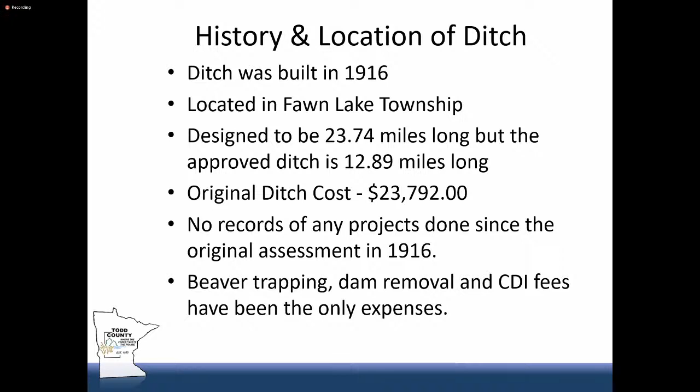Beaver trapping, dam removal, and ditch inspector fees are really the main expenses on this ditch system. It has a huge beaver problem. It's actually gotten better over the years, but in 2013, when the ditch systems were all brought up to date, there was an assessment done for $5,484.23, for beaver control and dam removal from the years 2008 to 2012. That brought the ditch system up to date on what bills were owed.

Then in 2015, there was an assessment that was all beaver dam removal and trapping. 2018's assessment was also beaver dam removal and trapping. We kind of did year-round trapping in 2018 and 2019, trapping year-round and doing dam removal whenever dams were found.

In 2020, we only had to assess $500 because there were fewer beaver dams reported and less trapping done. 2021's assessment was also $500, again with less trapping. For the 2022 assessment, there were some more dams reported this year, so I've got people trapping now and there will be more dam removal, so next year will be an assessment for that. I just put up a map.

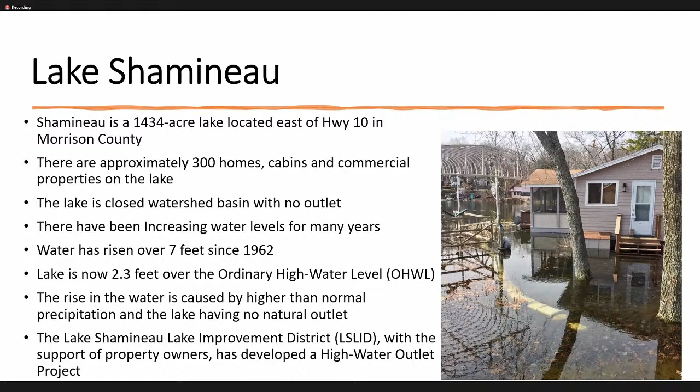The purpose of the high water project is to establish a maximum operating level, which Mike here is going to talk about a little bit in his presentation.

The project includes the installation of a lake outlet structure and pumping station at the west end of the lake. The water would then flow west, eventually reaching ditch 41 and then flowing to the Long Prairie River. You do have a route map that we handed out, and Mike is going to talk a little bit more about the route.

The LID has worked closely with the property owners along the route to ditch 41. For example, from Highway 10 over to where the ditch starts, we have worked with those property owners in Todd County to ensure that the route and the water will not be detrimental to their property. And we have obtained agreements for easements with the Todd County property owners west of 10, again to ditch 41.

They've also supplied us letters of support. In fact, speaking of letters of support, we received a lot of them, not just from those property owners, but also from property owners along ditch 41 and other Todd County residents. We'd like to take this opportunity to thank everyone who has signed a letter of support. We really appreciate that support for our project.

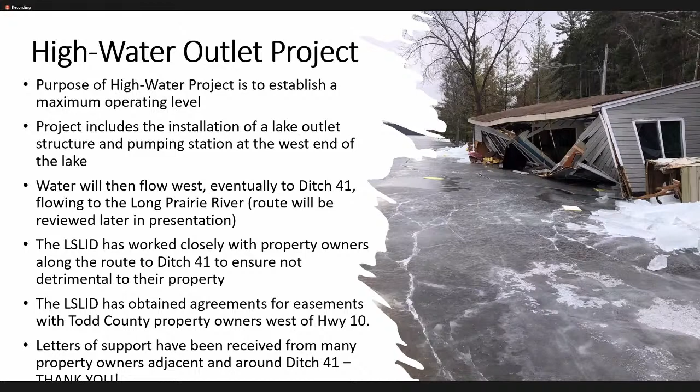A little detail on some of the funding. The project will be funded through charges to the Lake Shamineau property owners. The LID actually operates as a taxing district, so we tax ourselves for this project. So when I said earlier that 74% approved the project, they not only approved the project, they approved paying for the project. And I think that's an important thing for everybody to realize, is that we are paying for it ourselves.

There's no petition costs. There are costs, obviously, just to do this process. The LID is paying for them. It will not be paid for by Todd County residents.

One of the things we're very excited about is that Morrison County recently in May approved a resolution to contribute $200,000 toward the maintenance of ditch 41. They did that to show their support for the LID and for this project. That $200,000 will be available to Todd County upon award of a construction contract for the high water outlet project. So once the ditch petition gets approved, we go through design, we bid out the construction, and upon the award of that contract, that $200,000 would be available.

Another important piece for everybody to know is that an operating plan will be developed for the project. We're developing that by working with agencies, Todd County, DNR, and other agencies. Some landowners will have provided input. Mike will talk about this in more detail, but it will lay out when the pumping will occur and when pumping has to be paused. So there'll be some oversight through this operating plan.

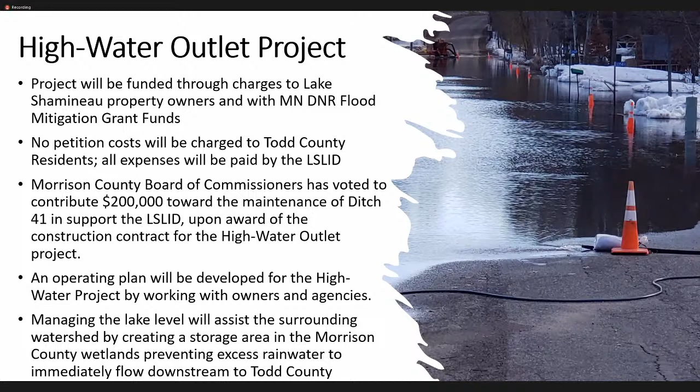Why is this so important to us? What if the petition is not approved? If the petition is not approved, the high water outlet project, as we're laying out tonight, will not be able to move forward, since access to ditch 41 is a key component to reach the Long Prairie River. So obviously this petition process is very important to us. And if the project doesn't move forward, there'll be continued flooding of homes and roads, and more property damage around Lake Shamineau and Scandia Valley. And of course, that $200,000 for maintenance of ditch 41 would not be available.

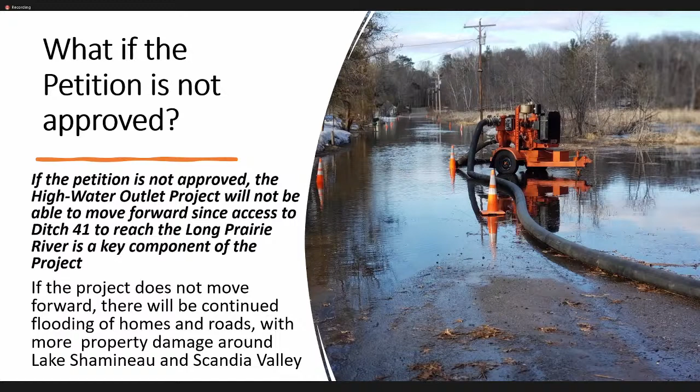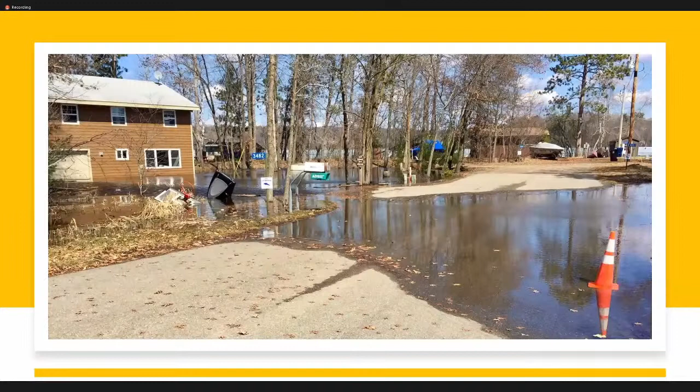And with that, I would like to introduce John Shockley, who's here to my left. He's an attorney with the firm Ohnstad Twichell. The LID has hired John to assist with the legal aspects of the project, and he'll be reviewing the petition process.

Thank you, and thank you to the members of the county commission for having this informational meeting tonight. I'm just going to have brief comments tonight about the petition process. As was said earlier, the petition process is governed by Minnesota statute 103E.401. After the construction of the drainage system in 1916, we can't utilize the drainage system as an outlet without the express permission of the drainage authority, that being Todd County. The authority to do that is gathered through the filing of a petition and ultimately the granting of that permit.

For the members of the public, that petition was filed with Todd County on March 8th of 2021. It described the necessity for the project, which you're hearing more about tonight, and the project features. It also included an engineering report on ditch 41 and its capacity for the project.

Having worked on several of these types of projects in the past, I think one important takeaway is that when we talk about capacity of the ditch, this isn't like a typical drainage project in which the drainage is uncontrolled into the drainage system. Because pumps are involved, those pumps can be switched on and off to match when you have peak flows and limited flows. And Mike from Houston Engineering will get a little bit more into the capacity of the drain.

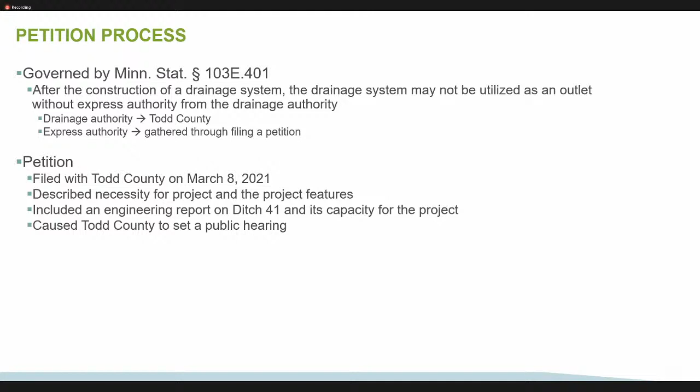So at the public hearing, the LID will again make a presentation on the project. Our understanding of reading the statute is that the main consideration during the public hearing is the capacity of ditch 41, which Mike will get more into, but we believe that the petition is consistent with that capacity because it is not an uncontrolled discharge into that drainage system.

If Todd County grants the petition, the permit would set the terms and conditions for the use of ditch 41. That could include having to follow the operating plan, having to comply with DNR rules, and other normal terms and conditions that you would see within a permit. It will set the outlet fee for the use of ditch 41.

As has been said before, that'll be paid by the LID, so we're not expecting the property owners along 41 to pay for that. That's a LID expense. And it'll also describe the property that is benefited by the use of ditch 41.

Given that this is an informational hearing, I don't want to take up the whole time period. And I think the most important person to describe a lot of the project is Mike, from an engineering perspective.

I agree. And next, I'm going to introduce Mike Opat from Houston Engineering. The LID hired Houston to complete the project design, surveying, permitting, and coordination with agencies, and hopefully, if we get to that point, we'll oversee the construction. Mike is the project manager and engineer from Houston that's been working with LID. And with that, Mike, we have the table.

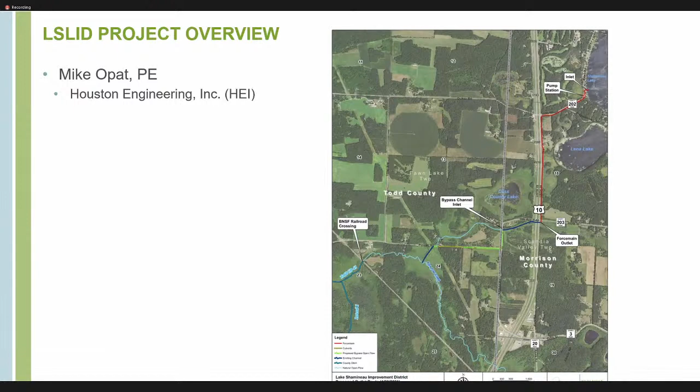So I'm going to give a quick overview on the project itself from a LID perspective. That's covering the transfer of water from the lake downstream. Primarily we're here to talk about Ditch 41 and the water moving through that system, but it's helpful to give an overview of how the water gets from the lake to the ditch.

Before we get into that, I want to cover some terminology and important information. You'll hear a lot of reference to the term CFS, cubic feet per second, which is a flow rate, a volume over time. To help provide context, 1 cubic foot is 7.48 gallons. Often you'll hear water movement described in gallons, so that gives you some context.

We'll talk about AIS, aquatic invasive species. And there'll be terminology in terms of a 2-year flow or 2-year discharge, or similarly a 1-year flow or a 100-year flow or 100-year discharge. That's pretty common when you start hearing about floods and those types of things.

A lot of times there's a misconception that, oh, we had a 100-year flood last year, so that means we won't have to deal with it for another 99 years. Well, it's a misnomer. What that really means is, for example, a 2-year flood means there's a 1 in 2 chance that event could happen in any given year. Similarly, a 100-year event has a 1 in 100 chance of happening. So it doesn't mean we're in the clear if we had one of those events the previous year.

Also, I want to point out there's a lot of data out there, and with the plans for the original ditch being from 1916, that was well before the establishment of the vertical datum of 1929. Now a lot of modern datum references the 1988 datum. So they're all a little different and need to be adjusted accordingly. Unless otherwise noted, we're referencing everything in the 1929 datum tonight.

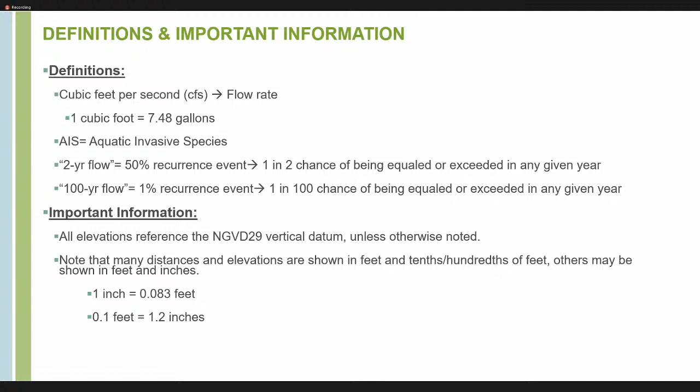So with that, I want to go through an overview of the project. The project, the beginning so to speak, would be the lake intake, which is going to be in the southwest corner of Lake Shamineau. For those familiar, it's kind of by the curve on Aztec Road.

There'll be a gravity pipe that extends out into the lake that will collect the water through a screening system. From there, the water gravity flows to a pump station, which will be right at that curve on Aztec Road. The pump will be in an enclosed cavern or wet well that'll be buried in the ground there.

We have a building proposed to house the AIS filter that will be required by the DNR. There's Eurasian water milfoil in the lake, so we'll be filtering that out, and no unfiltered water will move downstream. That will be housed in the building along with the electrical equipment and controls required to operate the system. And as we've talked about, this system is unique in terms of an outlet petition like this.

In that it has a pump and it can be controlled. So if the downstream water bodies can't take more water, the pumps won't be running. And if there's excess capacity and all the conditions are met, we'd be able to use that pump. So with the pump, then we need a force main system, a pressurized pipe to take that water.

That pipe will follow Aztec Road out to Highway 10. It'll follow US Highway 10 down to County Road 203. And from there it'll discharge into what's known locally as the Blue Line Ditch, which was recently cleaned out.

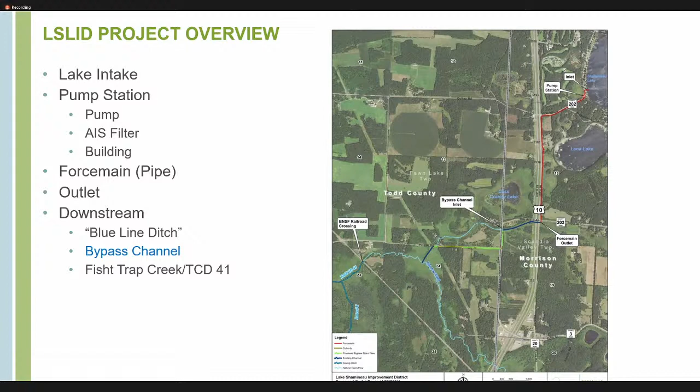As we've talked about, the discharge rate will be a maximum of 10 cubic feet per second. This was a balance between the downstream capacity and lowering the lake down as quickly as possible. Some of you may be familiar with a previous project that the LID had pursued a few years ago, where they were looking at a slightly larger flow rate. After some further analysis and discussions, and hearing concerns from downstream folks and the agencies, they went with a lower flow rate for the current project.

Also wanted to point out that for those familiar with the One Watershed, One Plan process ongoing for the Long Prairie River, Lake Shamineau and its watershed is included in the Long Prairie River watershed. It sounds like high water on lakes is one of the priority issues that's been discussed, so this project actually fits within that planning effort that's underway from the One Watershed, One Plan side of things.

As John talked about, and I've mentioned here, we're really just seeking to utilize the excess capacity in Todd County Ditch 41 to move the water out of the lake when the ditch has the capacity to take more water without causing any flooding or adverse impacts. So that's what we'll get into here throughout the rest of the presentation.

With that 10 cubic feet per second pumping rate and the assumed operating conditions and assumptions for precipitation and evaporation and those types of factors, we're estimating that it'll take 3 to 4 years to draw the water level in Lake Shamineau down from its current level down to the ordinary high water level. So that is the target elevation, the ordinary high water mark. They're not targeting to go any lower than that with the project.

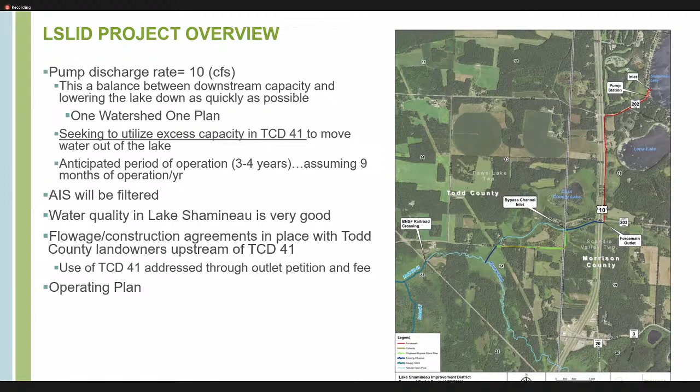As we've talked about already, there would be an operating plan, and we'll get into that in further detail. The operating plan is going to be a condition of the DNR permit. There will likely be conditions that the county board places related to the outlet petition that would also be incorporated into that. Just to boil it down into simple terms: if the ditch doesn't have capacity, the LID will not operate the pump. If the ditch does have capacity, the LID might operate the pump if there's a need on the lake and if all other conditions are met.

Again, we'll have the opportunity to put those conditions into the plan before it's approved and adopted. At this point, we do have a draft put together. We have circulated that to the DNR for their initial comments, and we received a couple of minor comments from them recently, so we're going to update things. We'll take any feedback we hear tonight and incorporate that into the draft. Our intent would be to provide a copy of the updated draft to the county prior to the petition hearing, which is scheduled for the 29th. Our hope is that we can give everyone an opportunity to review that, take a look at what's in there, and then offer suggestions and specific operating conditions that the county, on behalf of the ditch benefiting properties, would like to see in there.

I just want to point out that the operating plan does not guarantee that the LID will be able to operate their pump. So really the risk is on them, from the standpoint that they're going to invest in the infrastructure of the project, but if the downstream conditions don't allow for them to move water, they will not be allowed to do so.

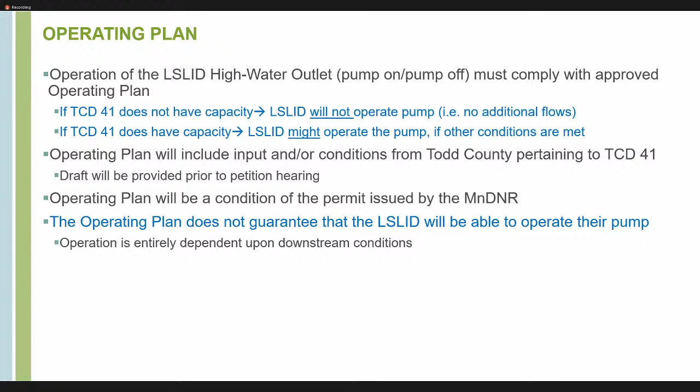In terms of the operating plan, a couple key points: we're not operating the project if the ditch does not have capacity. Really, I think what we're finding is that the upstream channels, namely that Blue Line Ditch, are going to be the limiting factor because they're much smaller channels. So for us to move the 10 CFS through there, the conditions are going to be more critical than it would be to add that water to Todd County Ditch or the Long Prairie River.

A major component of the operating plan is going to be monitoring, and the LID will be required to monitor conditions throughout the downstream waterways. That would include the Blue Line Ditch and the tributaries all the way through Todd County Ditch 41, as we would agree to with the county board in terms of where they would like monitoring to be completed. We can also discuss the timing and frequency of those monitoring activities and incorporate that into the plan as well.

The plan will also include considerations for weather conditions and seasonal climate conditions like spring runoff. On other projects, we've seen considerations for weather forecasts and spring flooding forecasts incorporated into the plan, and that's generally worked pretty well.

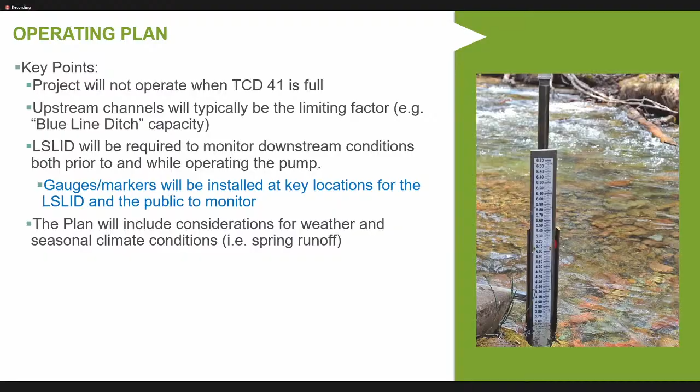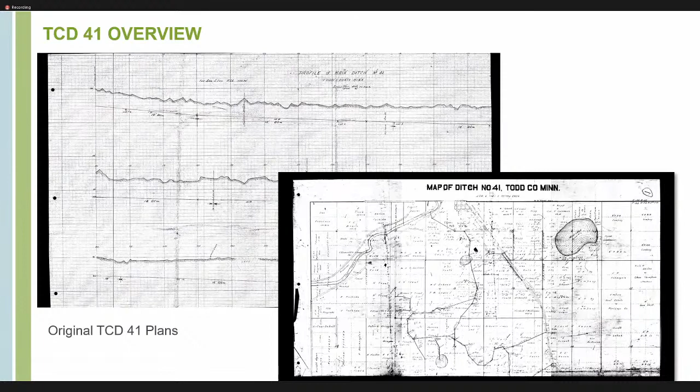Nancy had given an overview of the ditch, so I won't get too much into the detail there. I do have copies of the original plan sheets here on some slides. If anybody has any questions on that later, we can certainly come back to this. I think you've seen at least one of these maps in Nancy's presentation.

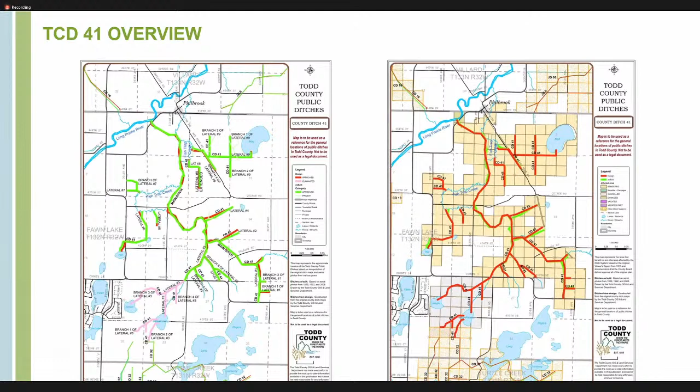The one on the left just shows the areas of the ditch that are included in the official ditch, both the main ditch and the laterals. The map on the right shows those same ditch reaches along with the benefiting parties that are assessed for the ditch. That kind of leads into a few more comments I wanted to make on top of Nancy's.

With this map, we've added some flow directions and a few labels that I wanted to point out. For those in the audience, you might be able to see my pointer. I apologize to those on Zoom, but off to the right side of the map, there's a label that says Lake Shamineau Discharge Location. Thank you for the help with the cursor.

That's the location where Fish Trap Creek crosses the railroad, which also coincides with the beginning of the ditch. So the water from the lake improvement project will come into the creek, flow under the railroad bridge, and then continue to flow in the creek, which is then Todd County Ditch 41.

From there, you can follow the arrows. The water is going to follow the main ditch, about 6.5 miles roughly downstream. It's not going to flow into any of the laterals. Most of those laterals were designed to enter the main ditch above the bottom of the ditch; some are a few feet higher than the bottom of the ditch, at least as designed.

There's also about 22 feet or more of drop from the railroad bridge down to the bridge or culvert crossing on County Road 28, right near the outlet at the river. So if I did the math right, that's about a 0.06 grade of drop going all the way through the system there.

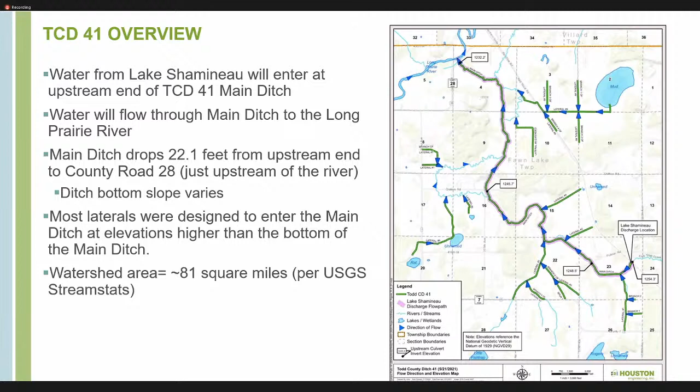The goal with the project is to move the water over here in a controlled fashion well before it gets that high, or the stories of damages that you heard from the LID are just going to get that much worse. So this is just an overview.

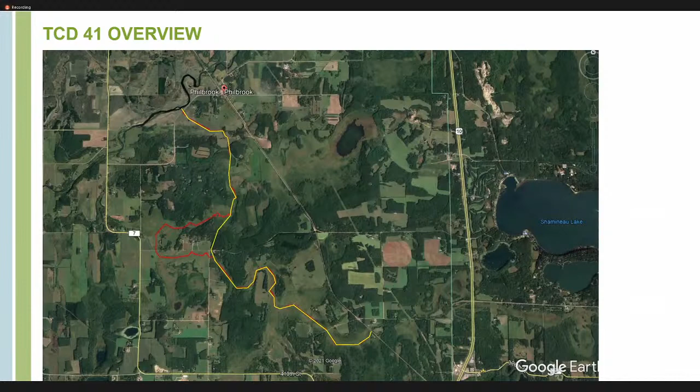I wanted to mention that our office did collect a drone flight, and we collected footage. We actually flew the entire project route and then included Todd County Ditch 41.

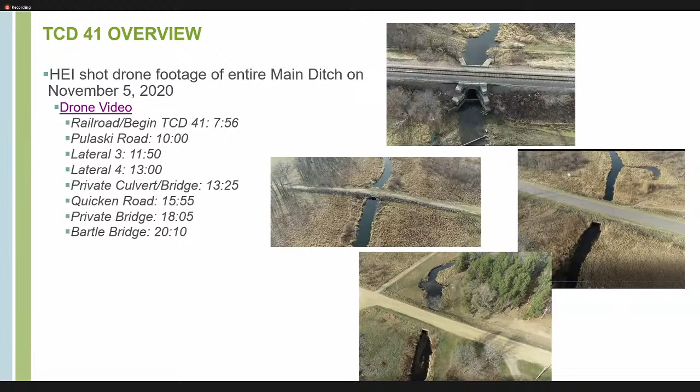So we flew that last November. We had pretty good flying conditions that day and got some good imagery. Just the video of Todd County Ditch 41 alone is 20 minutes, so I'm not going to have everybody watch that here tonight. But if there are questions, we can pull that up later and zoom in on certain locations. I just wanted to let everyone know we have that in case there are specific questions. I've offered to provide that to Nancy and the county so they have it for their records and for helping identify some beaver dams that might be out there.

Okay, so that covers the project, and we just went through some more information on Todd County Ditch 41. What we want to get to here is a discussion on the capacity and the ability for that drain to take water, with the understanding that the pump is going to provide some flexibility to make sure there are no adverse impacts. I want to give a quick overview, without getting too technical, on what we're talking about with the modeling we've done for that capacity analysis.

So when we talk about hydrology, we're talking about the quantity of water - looking at precipitation, how that translates into runoff off the landscape, and what that means for stream flows as it moves through a system. From there, as that water is in a system, that movement is what we'd refer to as the hydraulics, which gives us the water elevations and velocities. From there we can look at the capacity and identify critical locations along the waterway where we may want monitoring requirements and specific conditions in the plan.

Fortunately, there was some information out there so we didn't have to start from scratch. There are existing flood insurance study models and floodplain management tools for both the Long Prairie River and for Todd County Ditch 41, which is good news. However, those are intended for looking at flood flows, and as we've talked about, we're not going to be pumping water out of the lake when it's flooding. So we had to make some improvements to those models to analyze the lower flow conditions we're looking at when operating the project.

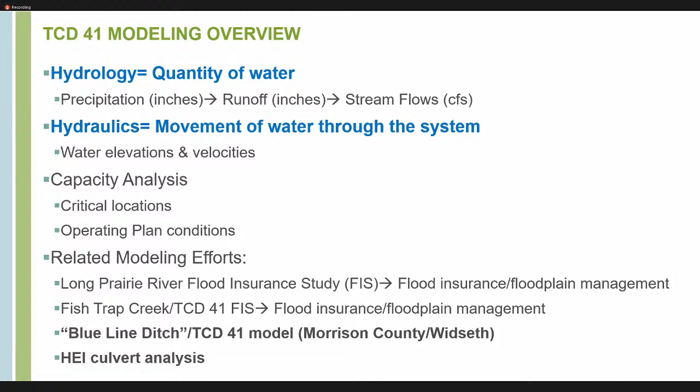So if I can get this to advance - I wanted to touch on that Morrison County model done by Widseth. They looked at what the impacts would be of adding about 4 cubic feet per second to the ditch. At the railroad bridge, they were talking about potential impacts of just 0.04 of a foot for a 2-year flow, which was in the area of about 70 cubic feet per second total. And at a 10-year flow of about 122 cubic feet per second, that impact is just 0.02 of a foot - well below even half an inch. It's pretty minor from that standpoint.

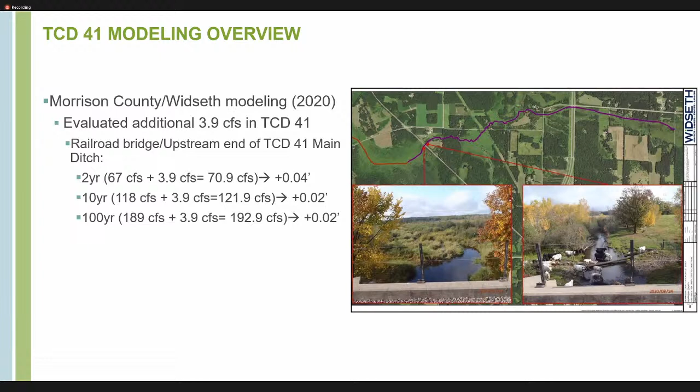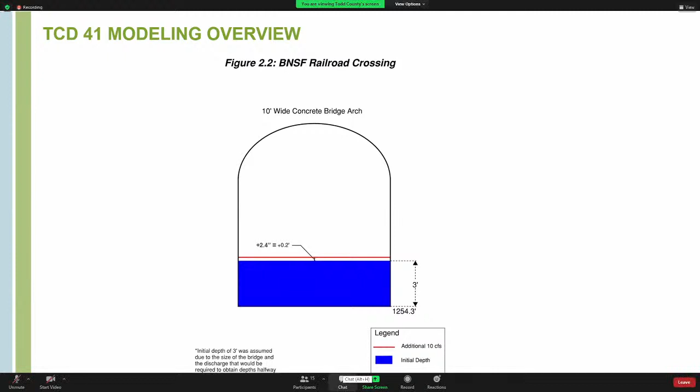As we'll talk about later, I think current conditions are far below those flow rates. Our analysis looked at that bridge - we made an assumption, just for analytical purposes, of how much water was in it to start, so we assumed a 3-foot depth in that culvert. If we added 10 cubic feet per second, the impact was going to be about 0.2 of a foot, or 2.4 inches, at that location. I think what we're finding is that the water has been far shallower than that for the most part in recent months. So again: hydrology - precipitation translating to runoff, translating to stream flows.

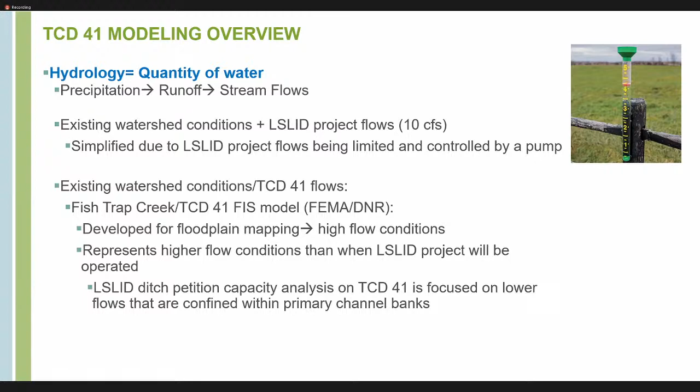In this case, we've got an existing watershed feeding that system. We're looking to add flows from the project of about 10 cubic feet per second. As we've talked about numerous times, it's simplified here because we have the controls with that pump versus an uncontrolled open outlet. As I alluded to earlier, those existing models were looking at higher flows and represented situations where we knew we weren't going to be pumping. So we needed to come up with some data to run through the models so we could look at scenarios where we would actually be running the pumps.

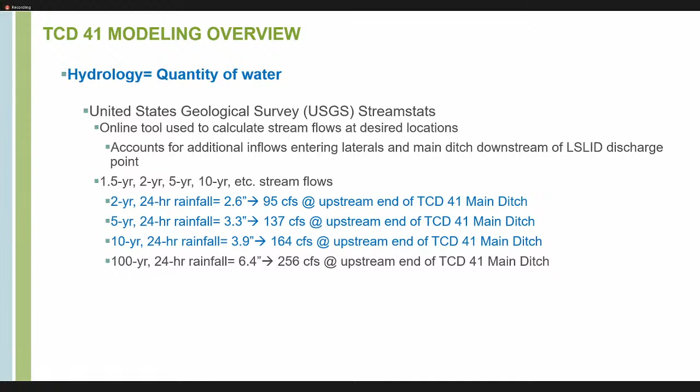As I mentioned, we've been monitoring recent conditions. The LID has been out there on about four occasions measuring the depth of the water at Pulaski Road and Quicken Road. That gives us a good idea to help calibrate our model, but also to give everybody some context of what all this theoretical modeling translates to in the real world. I'll show some examples of that.

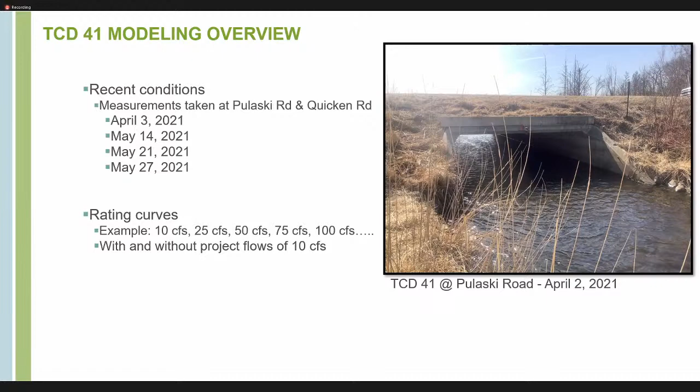And then to help us dial things in, we also run what we call rating curves through there. We pick a select number of flows that cover a broad range, run those through the system, and that helps us identify where the water starts to break out of the channel, or where we may have some additional capacity. We'll get into that here in a second.

As I mentioned, there were some existing models out there, and we were able to use those. We used the best available data in terms of LiDAR surfaces—a landscape image flown with lasers that collects relatively accurate data, far more accurate than the old USGS topo maps used for a lot of the older modeling efforts. We had more recent culvert surveys, channel surveys our office had collected, the original ditch plans, and some photos as well, both aerial and ground shots. We were able to merge all that together.

That allowed us to look at the flows and the capacity along the main ditch of Todd County Ditch 41. What we're looking for is the increase in water elevation as we move the water through the channel. We're not looking at scenarios with flood flows where water might be out over the banks—we're looking at those lower flows where we'd be utilizing the excess capacity in the channel corridor.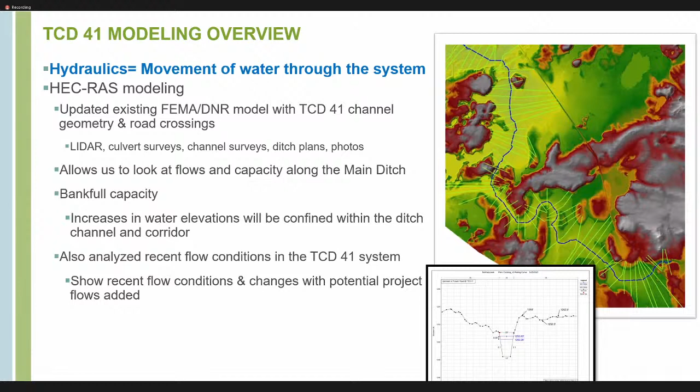That moves us into another ability of the model—we talked about hydraulics being water elevations, but it also lets us look at velocities. I know there may be some concerns about erosion in the channel, and the model allows us to look at that.

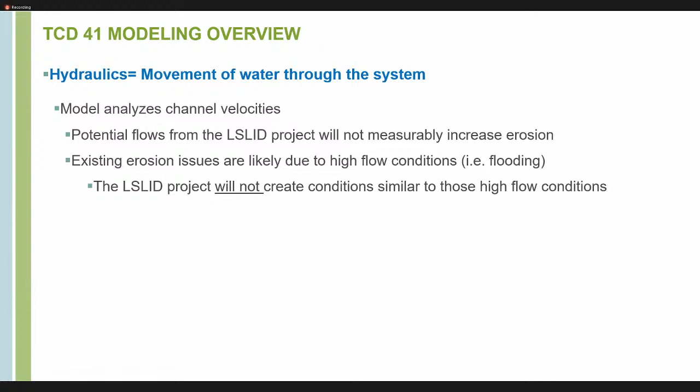The good news is that the flow ranges we're looking at, with our operating range and the additional flow from the project, don't show potential for measurable increases in erosion. It appears most of the erosion issues present out there are likely due to higher flow or flooding conditions, where more water is moving through the system, maybe squeezing through a bridge or a confinement, causing eddies and swirling that can lead to erosion. But from our analysis, the project is not going to cause measurable increases to erosion on the system.

I've got a few slides here, and I'm not going to go through a ton of scenarios and put everyone more to sleep than they probably are at this point. But I do want to assure everybody that we have looked into it. Our models have allowed us to analyze the system and provide confidence that we can operate the project without causing significant adverse impacts downstream.

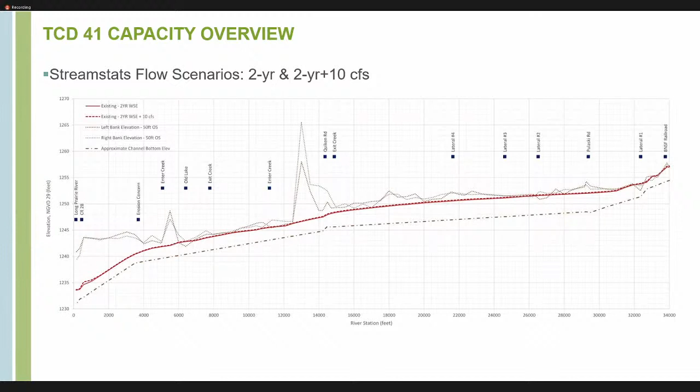That shows us what the impact of the project would be if the pumps were running when we had that 2-year event hit the system. What you'll see is that those impacts are very minimal, and in fact they're hard to tell the difference when you look at those scenarios. To help show this more pictorially, these diagrams show that same scenario, but we picked out two well-known, easy to see crossings.

Pulaski Road and Quicken Road. At Pulaski, you actually have a larger culvert there, it's a 16 by 6. And at Quicken Road, it's a 12 by 6.

Our model shows that with that 2-year flow, the depth at Pulaski Road would be about 3.7 feet. If you added the LID's 10 CFS to it, it would increase about 1.4 inches under that scenario. Similarly down at Quicken Road - keep in mind slope is a big factor on moving water, the ditch is steeper downstream of Quicken.

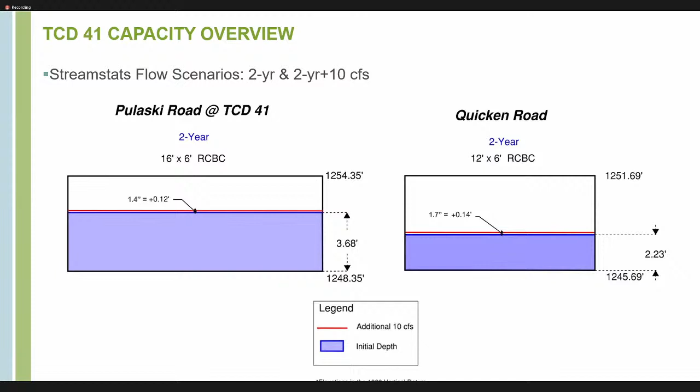So that's probably why they have a smaller culvert there. We also see the depth with that 110 or so cubic feet per second is 2.23 feet without the project. If you add the project in, it would go up about 1.7 inches under that scenario. This goes to show that really the ditch has capacity under that scenario. As you know, the base flows typically show to be much lower than that 100 CFS, so there's just that much more capacity to move that additional 10 CFS through the system.

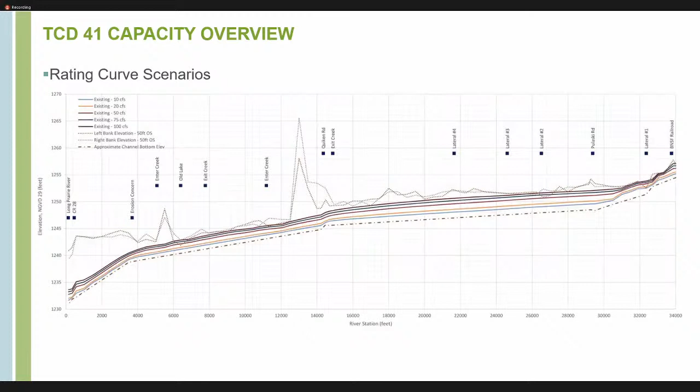I mentioned rating curves - this is a profile showing a rating curve scenario. Each of these lines between the bottom and the channel we talked about previously represents a different flow rate: 10, 20, 50, 75, and 100. That helps us dial in at what flow rate we start to see water approaching those overbank areas.

The next slide should be an example - here's a 100 CFS rating curve example. As we'd expect, because this is a very similar flow rate to that 2-year flow we just went through of about 100 CFS, you're again at that 3.7 at Pulaski Road. Adding the water from the LID would be about 1.4 inches of additional height at that location. And at Quicken Road, that additional 10 CFS would raise the water about 1.6 inches.

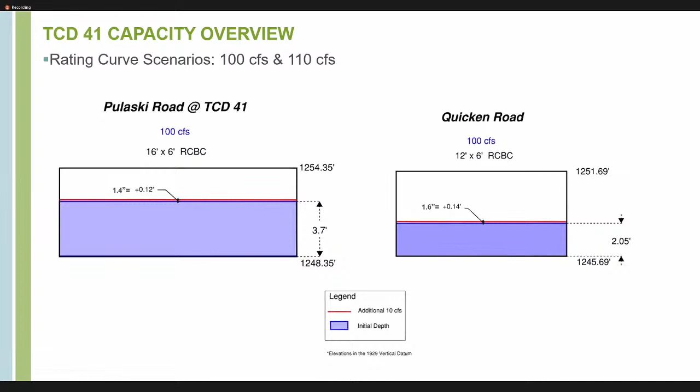I wanted to touch base on some of the recent measurements. We were out there on April 2nd, May 14th, May 21st, and May 28th. The water has gone down from April 2nd - I was actually surprised there wasn't more water in the system on April 2nd than there was. But on that date it was about 1.93 feet deep at Pulaski Road. Had we been pumping on that date and adding 10 CFS, the water would have been about 4.2 inches higher under that scenario.

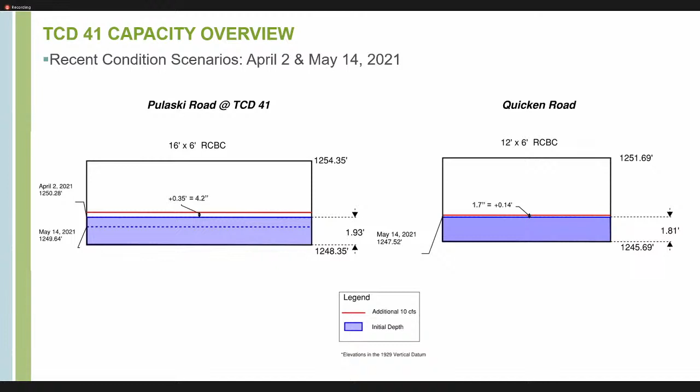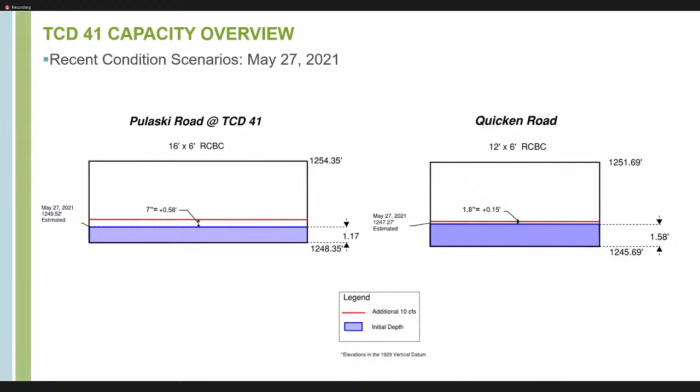That kind of concludes the discussion on the capacity of the ditch. Again, if there are questions, we can certainly come back to those slides and dig into those as needed.

For those interested in impacts further downstream, I wanted to include a discussion on the Long Prairie River - we had a model to start with there. Just to provide context, the 100-year flow rate at Long Prairie is over 2,500 cubic feet per second, so the 10 CFS from the LID project would be a drop in the bucket, although I don't envision they would be pumping when there's a 100-year flood going on.

But down at Philbrook, where the ditch outlets, that 100-year flood increases to 5,700 CFS. So there's a lot of watershed and tributary feeding into the river down there. Again, 10 CFS pales to that flow, but more importantly, that 2-year flow, which is probably more common down at Philbrook, is 1,500 cubic feet per second. So if you added 10 CFS, it's going to be 1/100 of a foot or less of an impact if the pump is running in that situation.

As we've talked about, the operating plan will include considerations for the river as well. We'll factor in the USGS gauge here at Long Prairie, which is about 36 river miles upstream of the outlet. So we will need some monitoring locations downstream closer to the outlet. We're envisioning those to be on the Highway 29 bridge, downstream at US Highway 10, and anywhere else in between that's deemed appropriate.

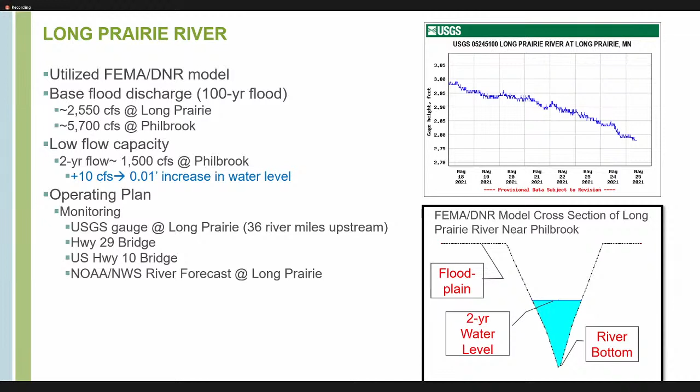And as we've talked about, we'll be using forecasts there as well. So in addition to weather forecasts, there's a river forecast put out by NOAA and the National Weather Service. With that, I think I'm going to turn it over to Cindy to cover next steps, and I'll take a drink and get ready for questions.

Well, the first thing is the petition hearing, as Mr. Dieter mentioned, will be on June 29th. I believe it will be at 7 p.m. And Todd County will be publicizing that hearing.

The next steps for us really look like design, permitting, and agency approval. So if the petition is approved, we would move ahead and finish the design of the project and move forward with getting permitting and agency approvals from the DNR and Corps of Engineers. There's a variety of entities, Morrison County, that we have to get approvals from. We're actually hoping that we would get that design and agency approval done by the end of fall of 2021.

Then we'll be bidding out and awarding a construction contract. We hope to do that by mid-December. And our other hope is to begin construction in January, with project operation to begin spring of 2022. And that, of course, is all dependent upon weather conditions and approvals by agencies.

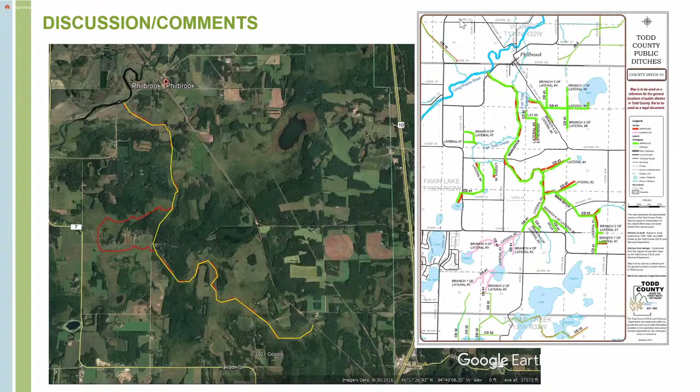So did they give us a total watershed area? They did - it's south of Quicken Road, Barb. Okay.